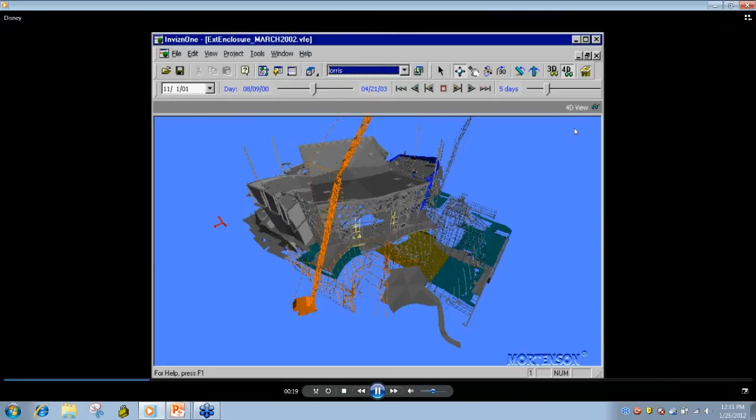It's not all that much different than what we use today. The graphics, of course, are a little bit better. You can tell it looks like somebody did a screen record, not an export. But you can see they had all the colors, they used the cranes, they did the sequencing. This was back in 1999 to 2002 that they created this.

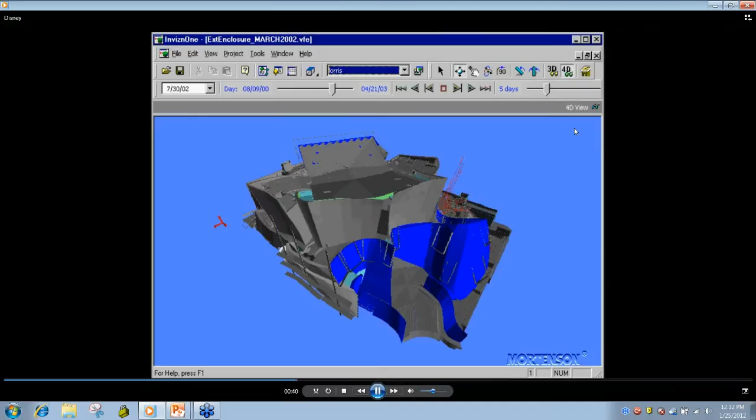This is the overall one. As you can see, the structure is definitely a product that uses 3D - the unique structure on the outer shell. So this one was the overall project.

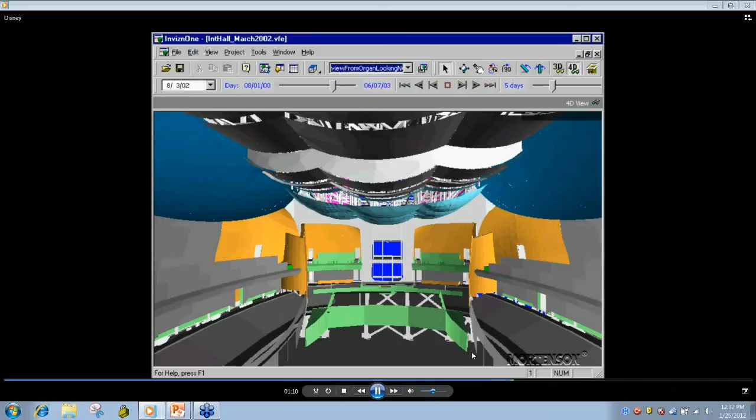Coming up here, I might just speed it up a little bit, is some detailed 4Ds they actually did to the project as well. This is some roof panels - they had all these crazy roof panels in the main concert hall. So again, they coordinated the panels, the steel, and even some of the MEP stuff. And again, this was back in 1999.

The other thing I would like to point out is in 2002, we formed our IDAT group - the Integrated Delivery Advancement Team - and all of our ICC's work underneath that group. From there, it really focused us on the VDC side of construction and put a good organization in place for Mortenson to start at that time and work for the future.

You can see there are quite a few different milestones on here. One of our latest milestones is in 2010, we signed an enterprise agreement with Synchro for our 4D solution.

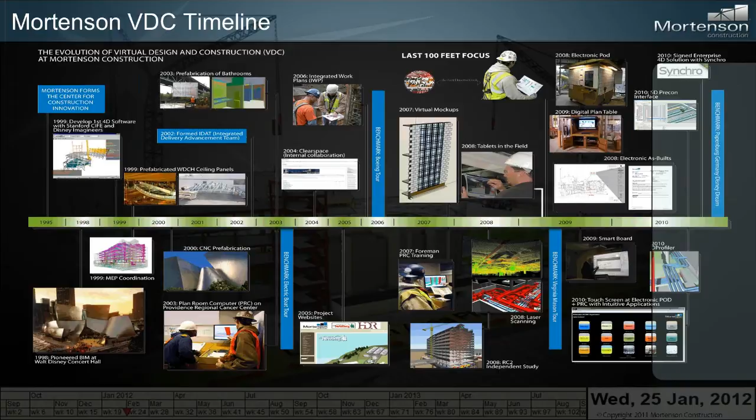A little bit about IDAT - IDAT's main focus is to integrate new processes, ideas, and stay on the leading edge of what's going on in the industry. We have 53 members across Mortenson in the IDAT group. We meet twice a year, once in the fall, once in the spring. We have a couple of representatives from each operating group that come to a central location.

We have a meeting, we have our committee report-outs, we do operating group updates. It's really a good way to collaborate and make sure we're all staying focused on certain things and we're not duplicating tasks across the country. It's a great group, and it's one of the main reasons I joined the company.

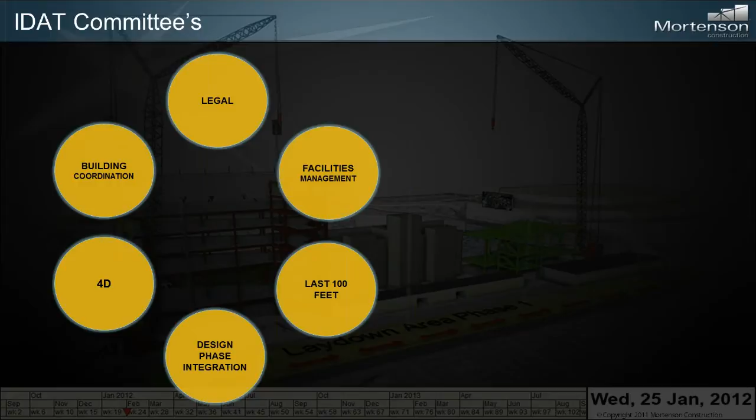The committees we have are a building coordination committee, a 4D committee, the design phase, the last 100 feet, facilities management, and the legal committee. All these committees come together as one to form IDAT, which is then controlled by an executive committee.

As usual, we come up with all these ideas, plans, and goals, but to get them approved, they have to go up to senior leadership. So we have an executive committee that consists of senior leadership members who approve our goals and plans and make it happen.

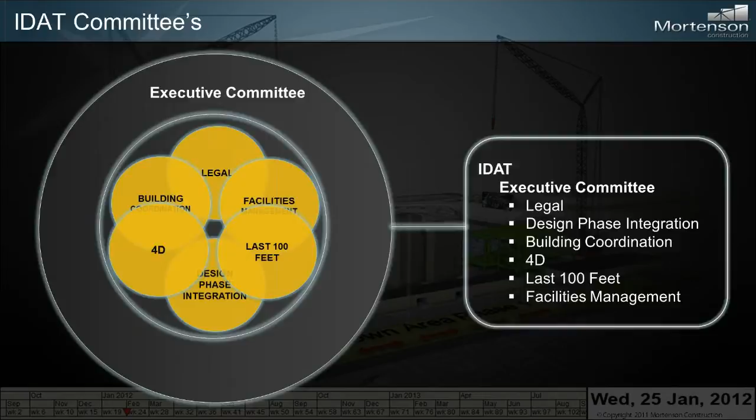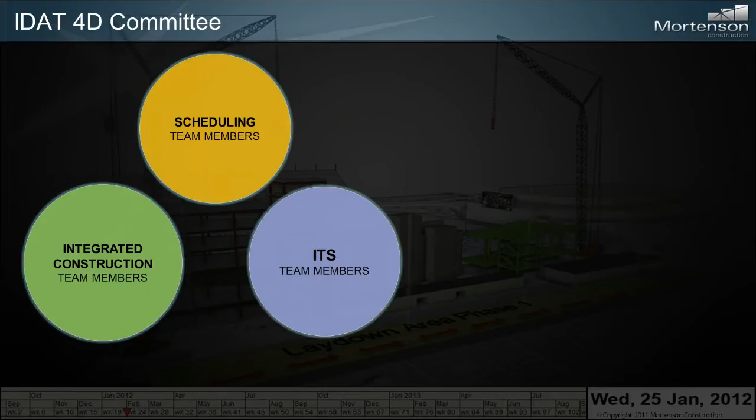A little bit more about the 4D committee, since that's what we're here to talk about today. Our 4D committee, at one point, we only had integrated construction people in the committee, and as we moved forward with 4D, we realized that to be successful, we were going to need to get scheduling and IT on board.

Before we start - early on, and Andre will remember this - scheduling was involved, but we kept coming in and going out, coming in and going out. Same with IT - they get involved, they back out, get involved, back out. Ultimately, we all got involved, we all got on the same page.

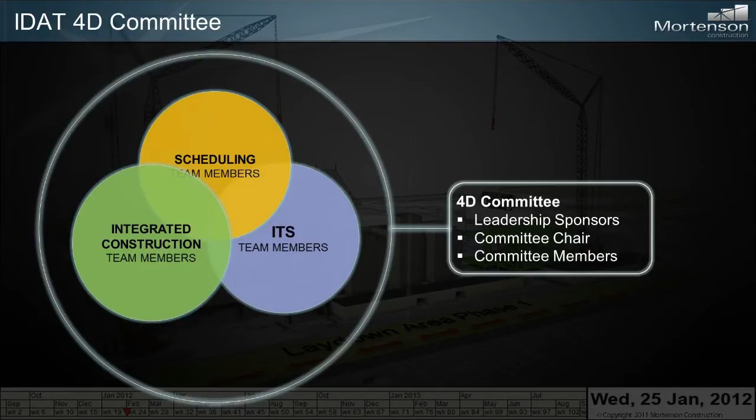That's the only way we could make 4D work at once. We all had to work together, and we just weren't doing that since 2002 - it was bits and pieces here and there. Again, the 4D committee has a leadership sponsor team that we run across all of our goals and schedules with, the committee chair - which I am, for the 4D committee - and, of course, our committee members.

From there, I want to start talking about our relationship with Synchro. In 2008, Tom came to Minneapolis to one of our IDAT meetings and presented Synchro for us.

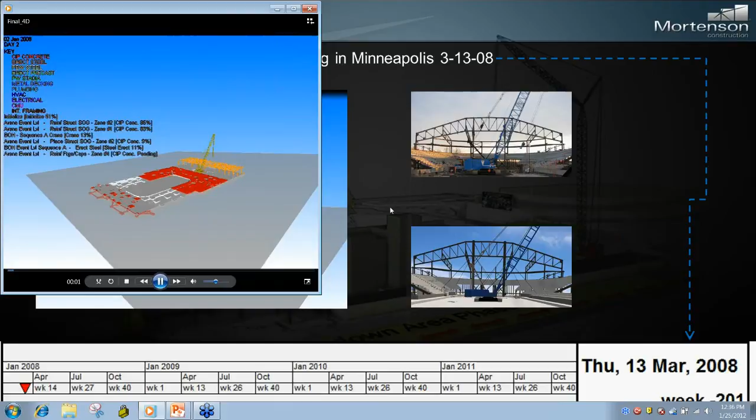Everyone at the meeting was pretty impressed with the software and really was looking forward to using it. At that time, we were using Navisworks. And what we've kind of learned on Navisworks, as other people have stated throughout this meeting today, is that it's kind of static.

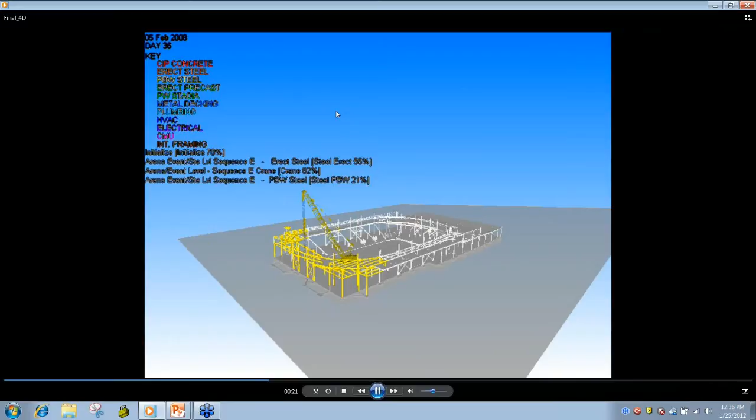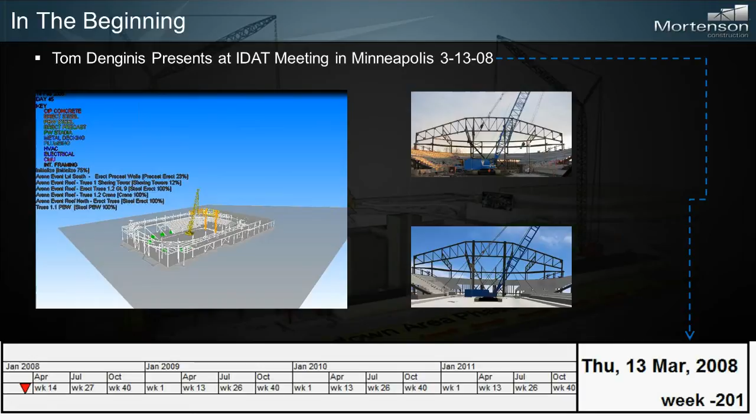This was a steel erection 4D that we did. It turned out to work for the project, but the amount of resources and time and effort that went into upkeeping it, updating the model, updating the schedule, getting it put back together—it was like every week we'd have a meeting to go over it. As we all know now with Synchro, we could work out these same issues in an hour to a two-hour meeting. Once we had this meeting and seen it, we were looking forward to moving away from Navisworks.

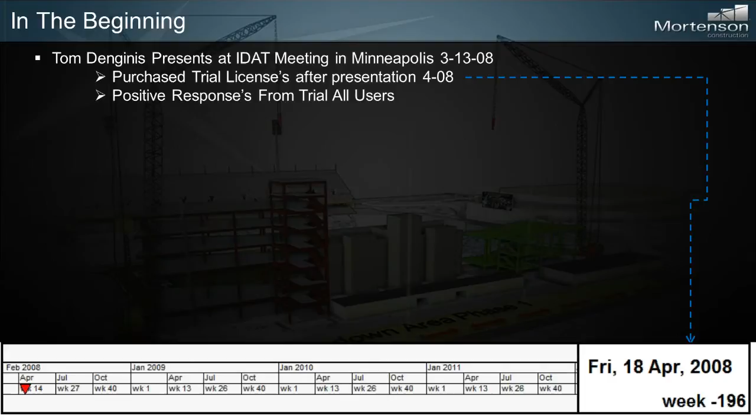Then in April of 2008, we bought our first trial licenses. A few of the operating groups agreed to try it out. Everybody that used it had really positive responses, so we continued to work with Synchro to work out a solution for us.

In April of 2009, we created our first production 4D models in Synchro that we were going to use for the job. I say production—we did do some BD work and some other ones—but this is what we really wanted Synchro for: to do on-site planning and sequencing.

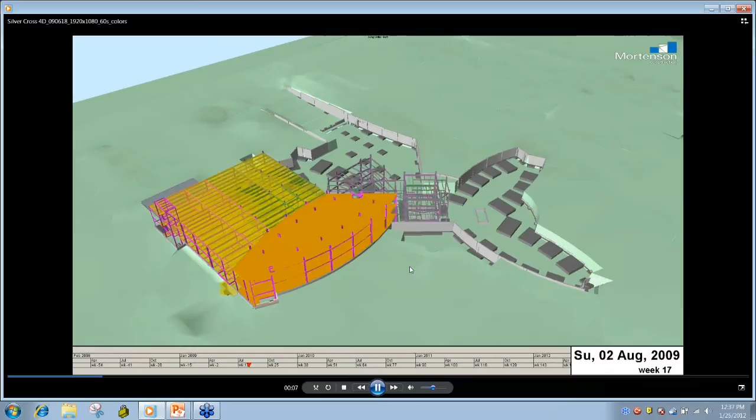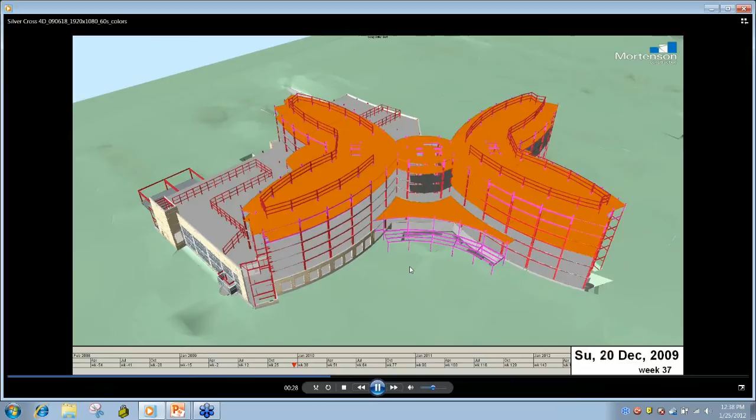So what we had to do is export out the P6 schedule. We emailed it across the ocean, and they would take a look at it. Ultimately, since the API wasn't working, we actually exported it into Microsoft Project and brought it into Synchro. But this also helped Synchro create the API between P6 and Synchro, which we have now, which has been very helpful.

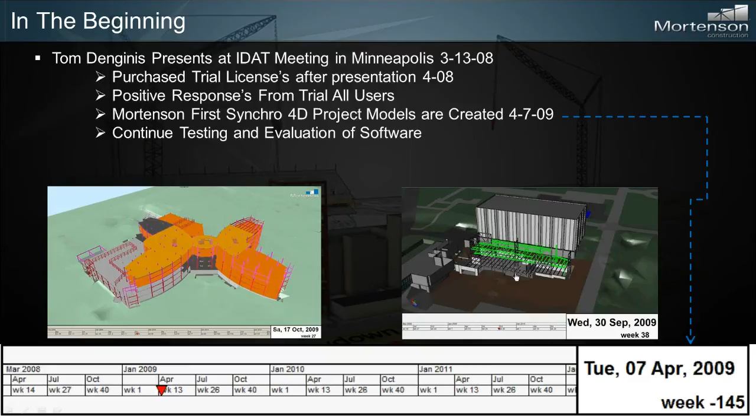The other project that we did was the steel erection for the Seattle University library expansion. On this one, we did mainly just the excavation and structure. It was very successful again in working out plans and sequencing.

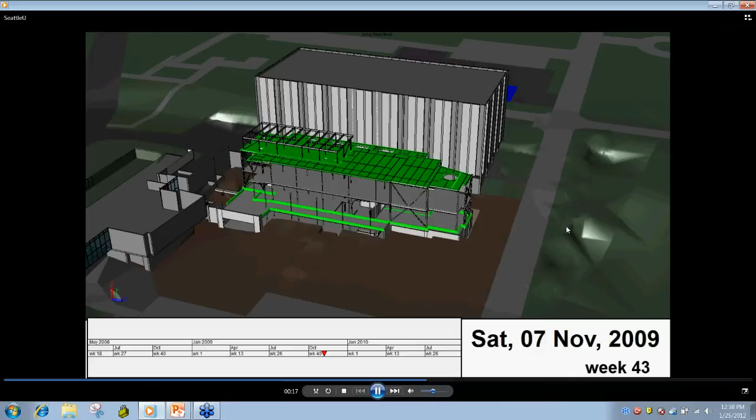Another thing that came from this, which kind of repeated along the way, is what I realized when I went over this with the superintendent: he never looked at the model. I showed him the model, he knew we had a model, but he never really looked at it. We go to do the 4D and he starts looking at it and he sees these brace frames that were designed to go from the first floor all the way to the top.

And he sees it and goes, 'Wait a second, we can't do this.' This was six months before we started, and our first RFI came from reviewing the Synchro model and seeing the brace frames were not designed correctly.

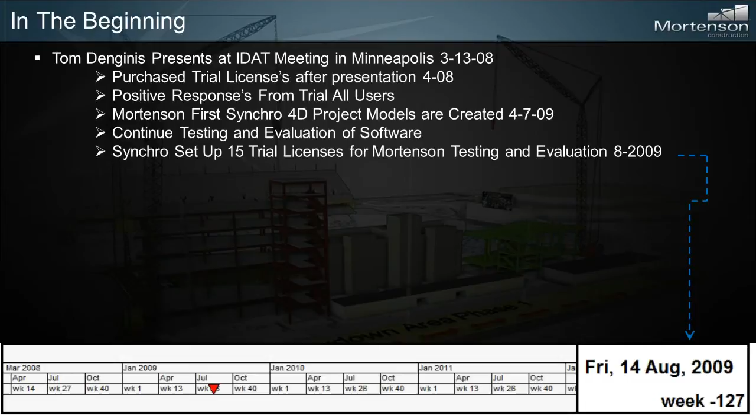From there, we set up 15 trial licenses with Synchro. We worked with Tom to continue our testing and evaluation. From there, in February of 2010, we had our first success with getting the API working with P6.

We still had some issues as far as how long it took and some timing issues. We continued to work with Synchro on that—they were great to work with. They helped us get everything up to where we wanted it. At that time, we got 20 more licenses for 90 more days to continue our evaluation.

At that point, we were able to get the scheduling department officially on board for testing. Until that API worked, the scheduling department didn't want to get involved—we were doing a little bit of testing, but we couldn't get them on board because how do you bring the schedule into Synchro? It still had to go through the ICC's hands, and it was like, no, that wouldn't work. So now we were fully on board, and we were working together with the ICCs to keep it moving.

Another big thing I got from the schedulers themselves is when we showed them Navisworks—again, it's a modeling software, it's a design tool, it's not a scheduling software. When they saw Synchro and saw that it had scheduling parts to it, they felt comfortable with it, and that was another key part of getting them on board.

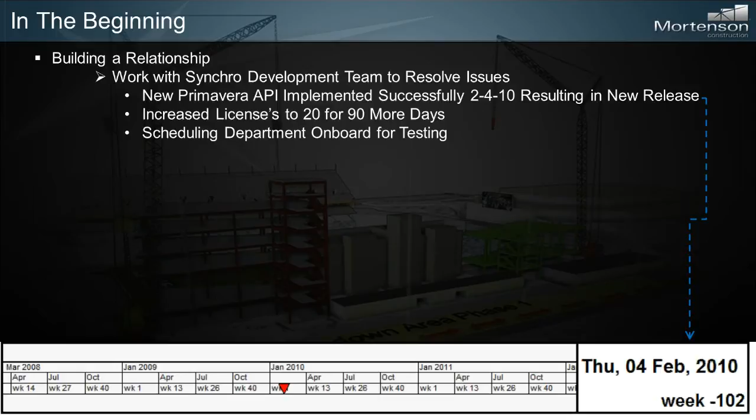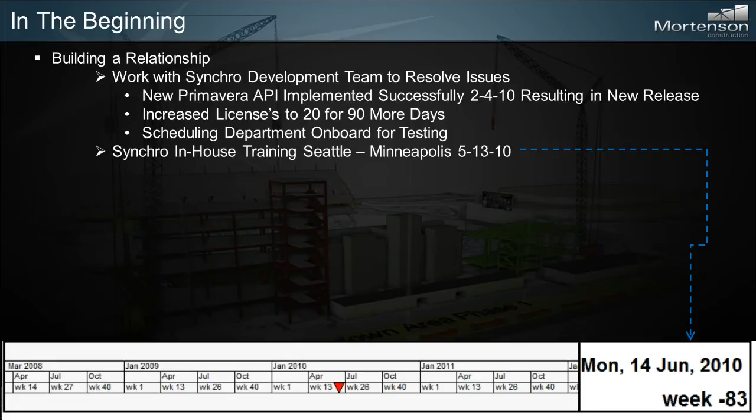After that, Stephen Dolan came to Minneapolis and Seattle and gave us the one-day training program, which was key to keep our evaluation moving and get the right people trained and involved and ready to go with Synchro. This was also key because the Minneapolis operating group was not on board with this. So we brought in two of their ICCs, and since I was the scheduling manager in the Minneapolis office at the time, we sat down and Stephen trained us. It was a very good training session, and it really got Minneapolis on board.

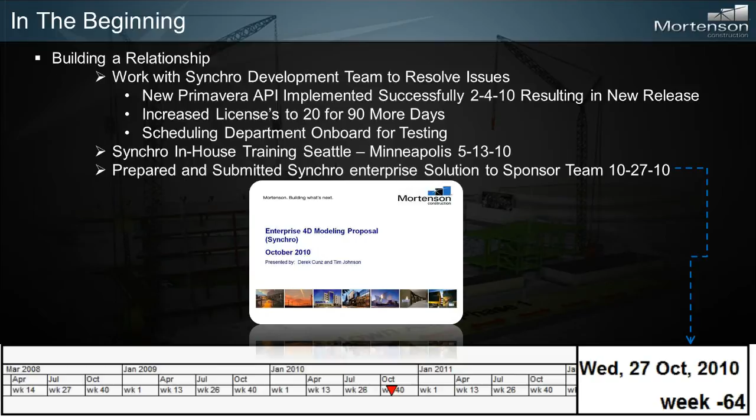From there, we prepared and submitted our Synchro Enterprise solution to our sponsor team in October of 2010. After some evaluation, the sponsor team agreed and the solution was signed.

If you notice, there's quite a bit of lag between when we had the training and when this was signed. A lot of that was because we were still working on the API issues, trying to reduce the sync time. It was about 4 to 6 hours for about a 4,000 activity project to get synced, and by the time we had this signed, it was down to about 2 hours, out of the Minneapolis office syncing to the remote site in Seattle.

Once we had the agreement signed, we formed a rollout team to roll out Synchro to the company. This team consisted of an IT lead, Kathy as the scheduling lead, and me as the ICC lead. We created a training and deployment strategy and then recommended an approach to our sponsor group.

The sponsor group approved the rollout, and we identified our pilot groups. We identified at least one pilot project from each operating group, so that way they could all be involved and give us what they needed.

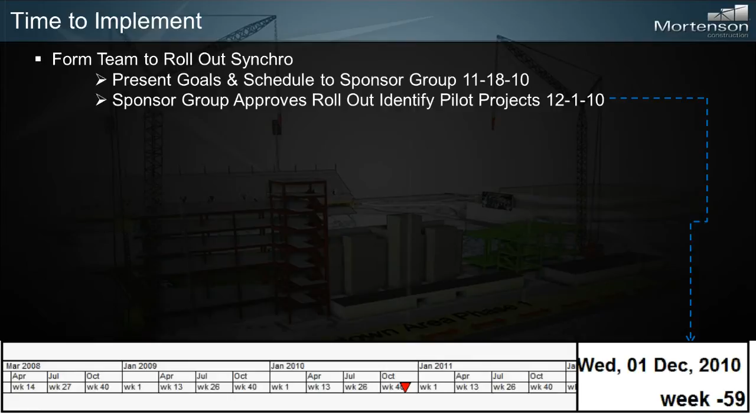From there, we realized for this pilot team to be successful, they were going to need training as well. One thing we needed to do to get training for our Mortenson personnel was work with Synchro to get their training program, then update it to be P6 instead of Microsoft Project. We had two full-day training sessions in Minneapolis where people came in from across the country, schedulers and ICCs, to take on the training.

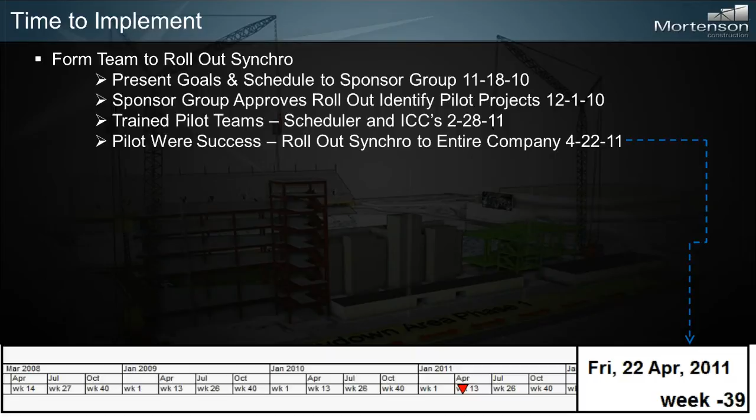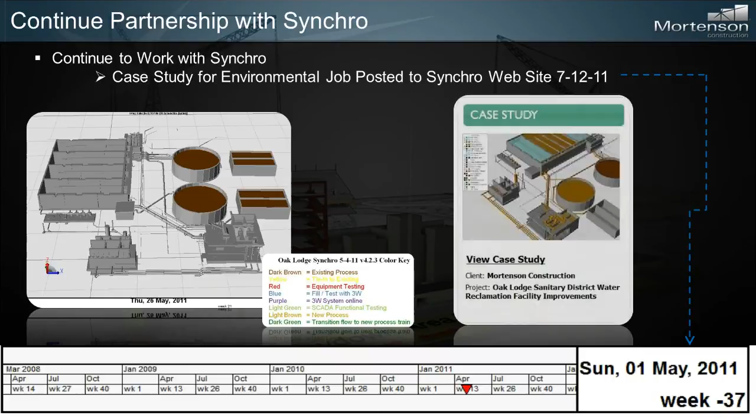The pilots were successful, and in April of 2011 we rolled out Synchro to the entire company. From there, we had quite a few projects take on Synchro and start using it. One of our first unique uses of Synchro was a case study we did for the Oak Lodge wastewater treatment plant in Portland, Oregon.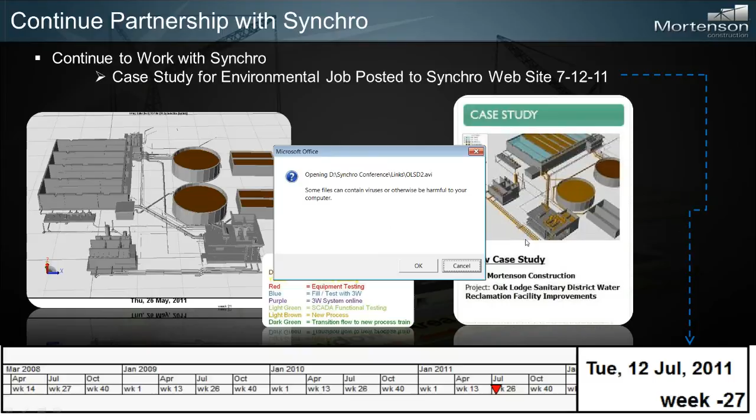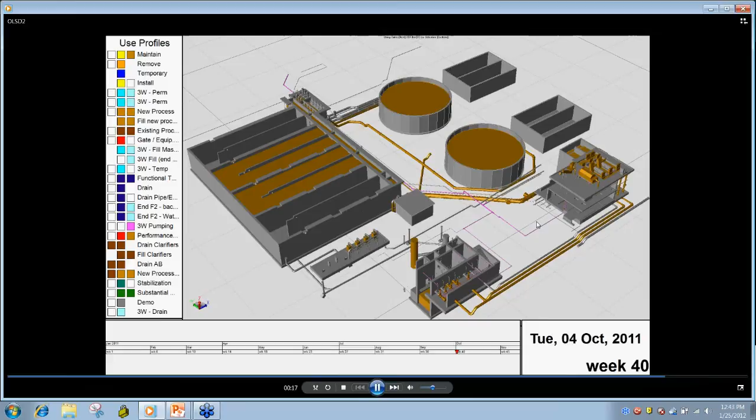This project was a pretty unique situation in that our scheduler took the model and linked up all of the scheduling activities to it. The schedule we were looking at involved an existing plant with an expansion, and there was a key date set where they were going to shut down the plant for 8 hours to do the switch over, turning off all the old stuff and turning on all the new stuff.

As you can imagine, you don't want something to go wrong at a wastewater treatment plant. The project manager liked the presentation so much that he asked the scheduler to stay with him that afternoon, and they trained him on how to use it. From then on, the project manager kept the Synchro model and schedule up to date, using it in all of his planning meetings, sub-meetings, and owners' meetings. It was a great success for the project.

One of the next things we did was prompted when one of the guys from a federal contracting group noticed that Synchro and Bentley were having a partnership. In our federal contracting group, we worked a lot with the Army Corps of Engineers, which required MicroStation models. Once I saw the article, I wanted to be part of this and help test it, because we were falling behind in those groups as far as Bentley and doing the 4D work.

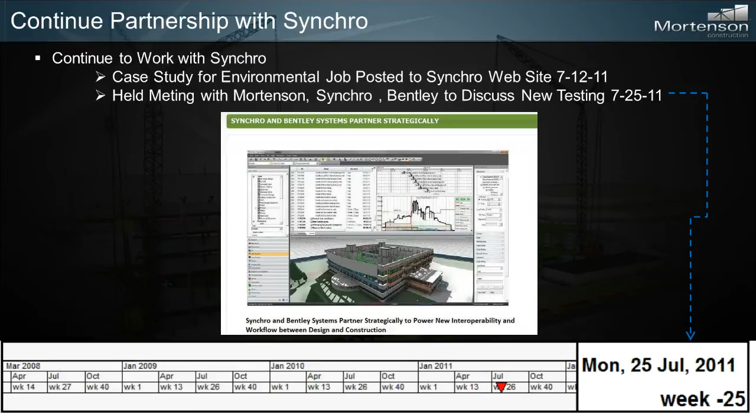We had some workarounds we had to do, but it was a lot more work than they were willing to do for the 4D. So once we got that, we helped Synchro, supplied some models to them, and did some testing on our side. Today they're creating 4Ds with none of the issues we had before. We're looking forward to the new release of the next upgrade.

Then in September, Tom got us a beta version of the next Synchro with the new API for the new Primavera P6.8, because since about June of 2011 we were testing P6 version 8. We were ready to go to it.

That was pretty difficult with that web application, so we needed to test Synchro with it. Synchro had to roll out with P6V8 when we did it, and we had to make sure everything worked pretty seamlessly. And it did. Since we had already rolled out Synchro to the company, we have strategic upgrades, and we didn't want people going to the next version while running multiple versions across operating groups. So we worked with IT, and they set us up a remote desktop to continue testing the API splicing, and that was key for us to keep testing and moving forward with Synchro while staying in production on the projects.

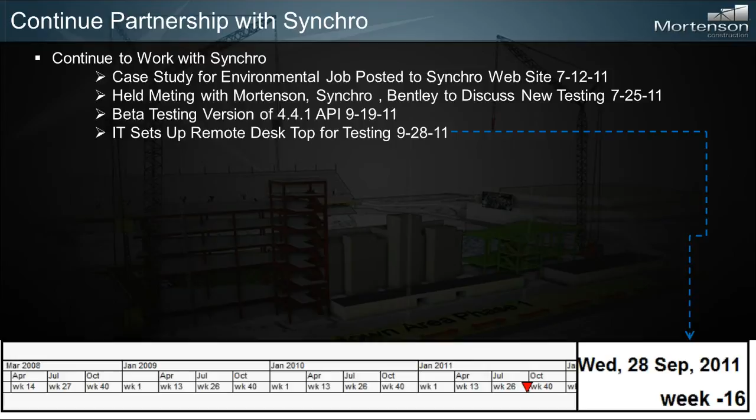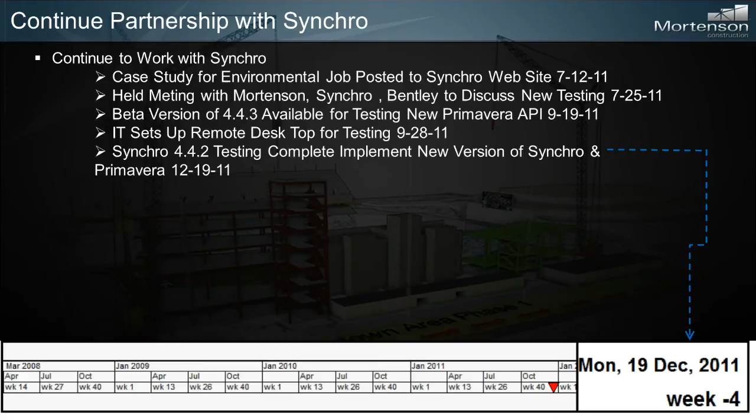This remote desktop is a Citrix desktop, so everybody had to go in through Citrix to do any testing. That was our first look at how Synchro worked in Citrix. Then in December, we rolled out the new version of P6.8 along with the next version of Synchro seamlessly, had no problems. All the projects were able to update with no problems syncing or with old schedules. Everything worked fine. It was the P6 side that didn't work properly.

But we were able to continue moving forward without any lag time. That brings us to our current state. One of our big focuses in our 4D committee is training, and we realize the more people we can get trained and familiar with the software, the more people are going to use it.

Like Neil was telling you, with Synchro's help, we started with their manual and updated it to include P6. We are continuing to update the Mortenson ICCs this week. They get sent the manual, they have someone to oversee them, and they have to work through all that training. This is lots of feedback.

We are just now incorporating it into our superintendent training, more as an overview for what they can see out on the site. We're going to use it for their 3-week or short-term look-aheads. We've put it on the plan room computers out in the field so they can pull up the model and see what's going on. It's getting ready to be rolled out in our plan of the day meetings at one of our job sites, so the superintendents can be right there with the model.

We also have some schedulers on board with it. They are also being trained, so we have job site schedulers actually using Synchro out on the job site with the superintendents. And we are getting ready to put it into our engineer training. We have a program where engineers go through scheduling training, about a 6 to 8 week in-house course, and during that time they are going to be doing Synchro on the site. So this is going to be pretty helpful. The first project using this is going down, I think, this year.

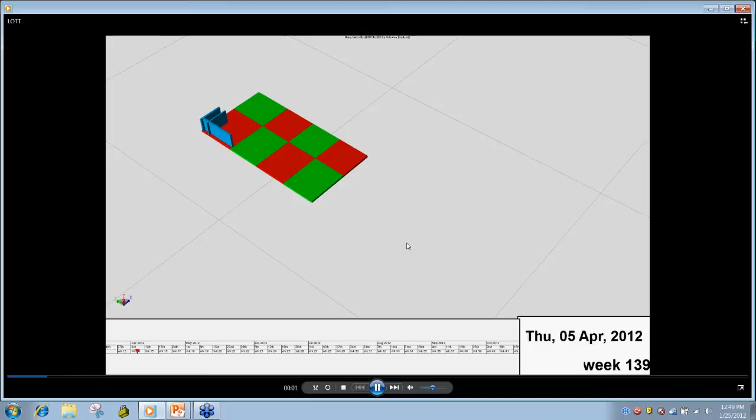Another one of our current uses is what-if sequencing and material sequencing. I'm going to show you an example here. This is another wastewater treatment plant, a big aeration basin they're going to build. If you can see the way the concrete has to be poured, it has to be poured in certain sequences because of cure time, so they have to stagger the pours in the way that it's going to be built.

So with our ICC working with the superintendent, we were able to clearly work out the sequence for him, and he was super happy with it. He's so impressed with the software that he's going to use this 4D model, send it out to the form subs and say, this is what we're building, this is how we're going to build it, we don't want any extra forms, give us a quote and give us the material to build it just like this. We're going to use the 4D model to get that information from the sub.

Another thing we've noticed, which has come up a few different times today, is that when you're doing a 4D model and you add every piece of detail from all the models you get, it really slows down the 4D modeling and everything else. So what we've decided is we're identifying certain areas of a project, that piece of the schedule and that piece of the model, and concentrating on those areas, just creating mini 4Ds of little areas.

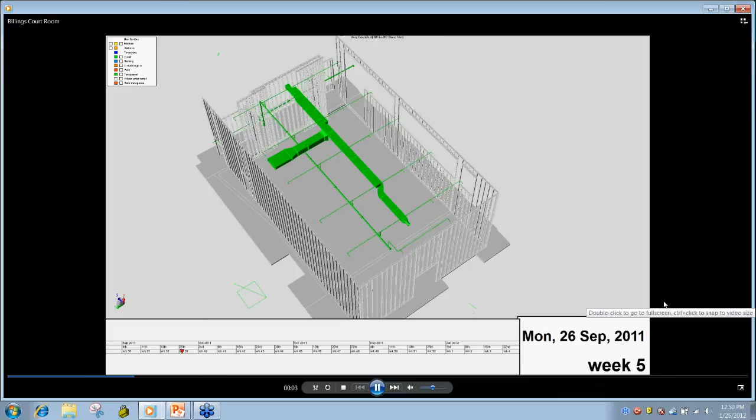The one here I'm going to show you is in Billings, we just finished, or we're about to finish up a new courthouse for the GSA. And in this courthouse, there are 4 different courtrooms that are almost identical. So what they decided to do is take one of the courtrooms and work out all the sequencing from the casework to the MEP, to the furniture, to the flooring, and worked it all out through here.

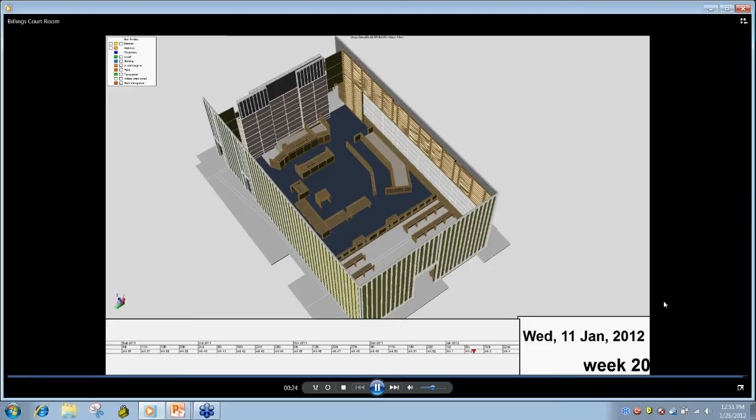And again, in this one, they found constructability issues with drawings compared to what the subs were going to do. And after a couple of weeks of meetings back and forth, they were able to use these models again to work with the subs and then show the exact sequencing of how everything is moving.

Another one that came out of the Billings courthouse is that one of our new requirements for any type of work that we do is we do an integrated work plan. And our work plan has safety, quality, sequencing, all the things you would need to do for a certain piece of the project. On this project, they could talk about sequencing to a point, but...

What our VDC was able to do is he embedded the 4D sequencing video into a PDF that was then used at the plan of the day with the subs and everyone else to show the sequencing, not just talk about sequencing. And again, everybody was really impressed and it ended up being a huge tool for this part of the project.

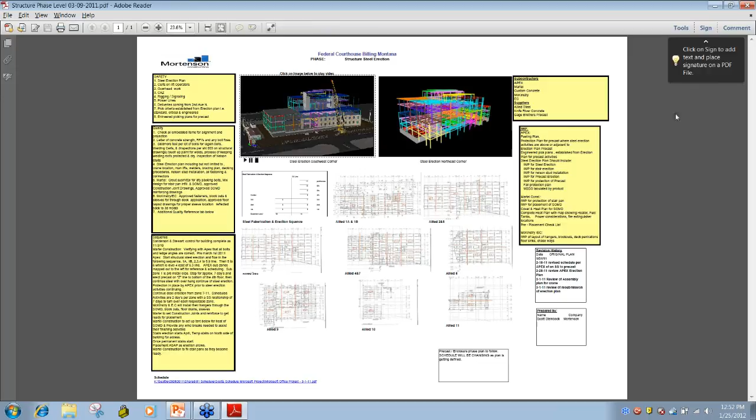Another thing that we're currently seeing more and more is requirements to do 4D. More and more owners and projects are wanting a 4D project. From here, I'm just going to start playing a compilation and kind of talk through the rest of this.

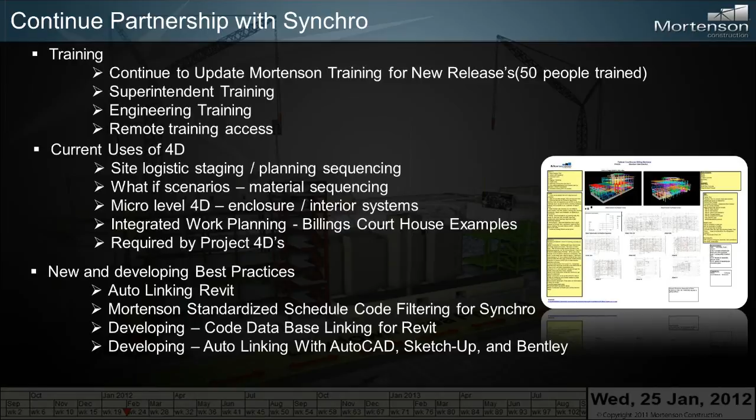The first one that's going to be on our compilation video here is the Pegula Ice Arena from Penn State. This project requires a 4D update along with the schedule every month. And from this project alone has really driven a lot of our best practices that you've seen on this slide before.

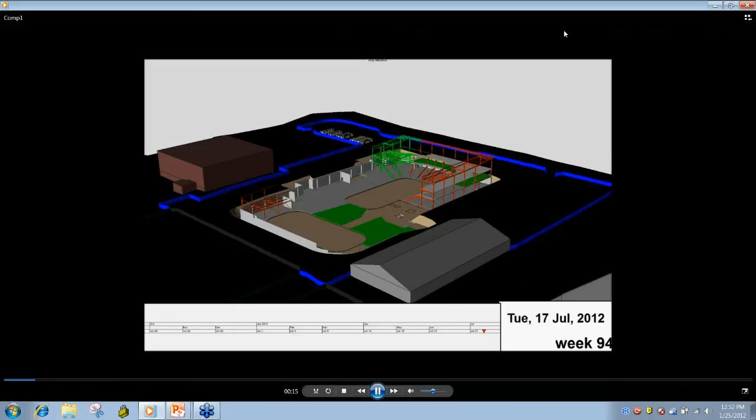One of the first best practices we developed was auto linking with Revit models. And that became key to really being able to keep the models up to date, linking the models very quickly.

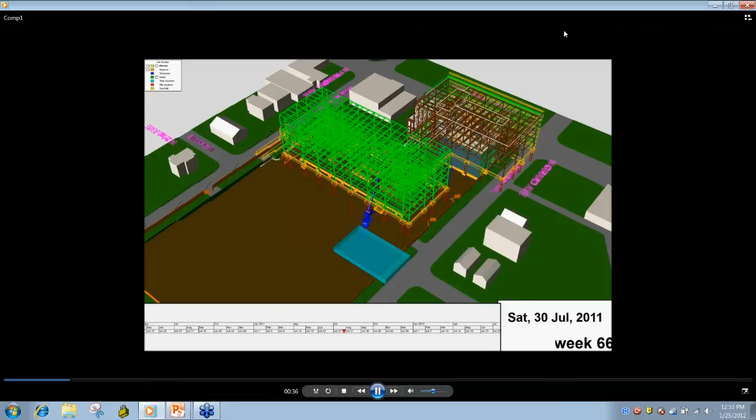What we were able to do is in Revit, when we made an added user field called 4D, we could take the codes from our schedules and put them in that user field. Then when you bring the model and the schedule into Synchro, you hit auto link, set up your parameters,

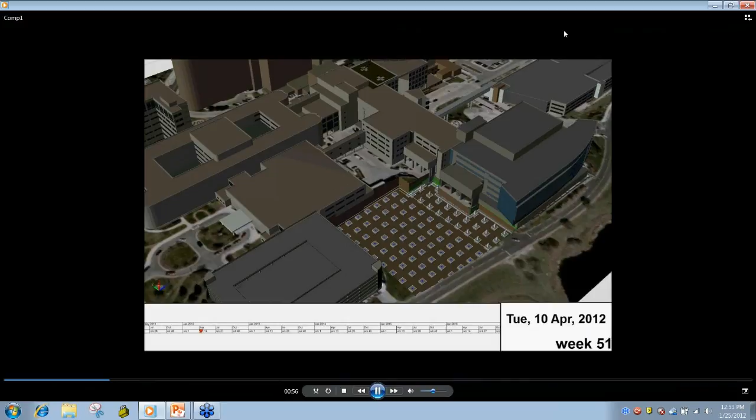push the button, and within a few minutes your whole project is all synced up. And along with that, with all the work we have done with Synchro, it is now able to resync the schedule back and forth, and we don't have to have the same schedule name for our what-ifs. It's been very nice for them to be able to link the model a lot quicker by resyncing.

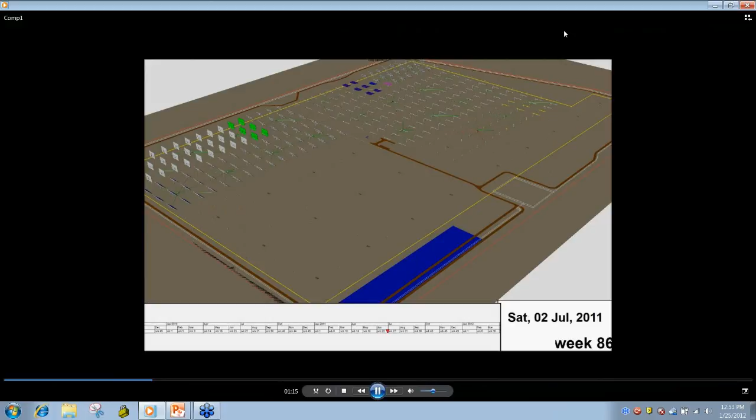Another best practice we did is we had a scheduling standard that we use for scheduling in Mortenson. With that, we were able to take advantage of that standard and develop filtering systems in Synchro that really easily let us filter out the schedule and the model, if it's a Revit model, showing the type of work and where it's at. So we can just say, let's see steel erection.

We can take the overall 4D model, filter out everything with the steel, and model steel and the schedule and run just the steel without having to go out and create a whole new model.

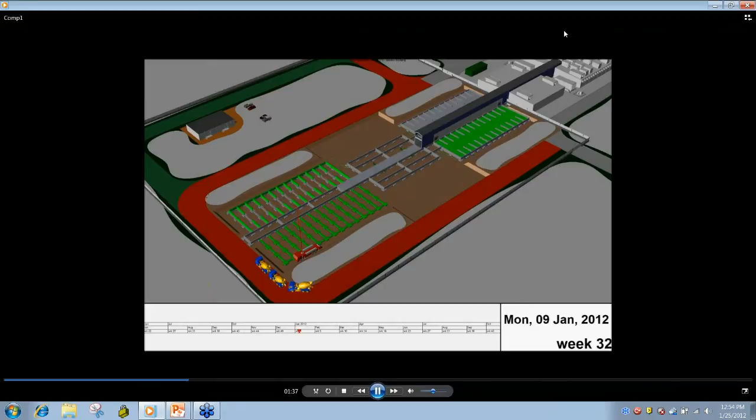The other best practices we're developing right now on the Pegula Ice Arena, again with the updates every month, we're getting the updated model like every month as well. And instead of having to go back into this model and recode it every time we get a new model, we're working on a database link where we can store the codes in a database outside of it.

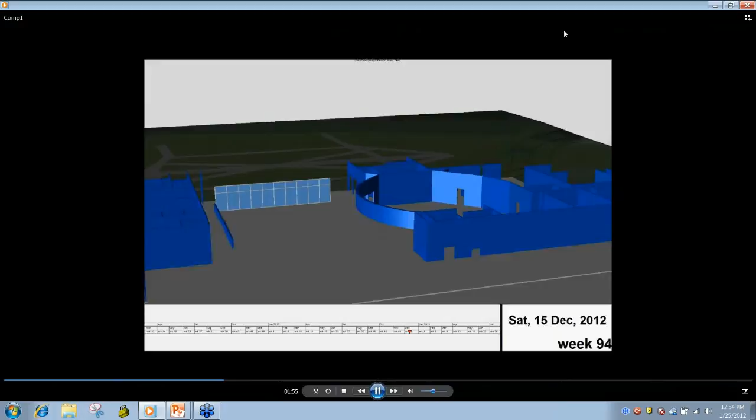We get the new model, it goes back and looks at the model's unique IDs and reapplies the codes to all the existing codes that we have. We just have to add the new codes, bring it back into Synchro, auto link, and we can update a model in a couple hours.

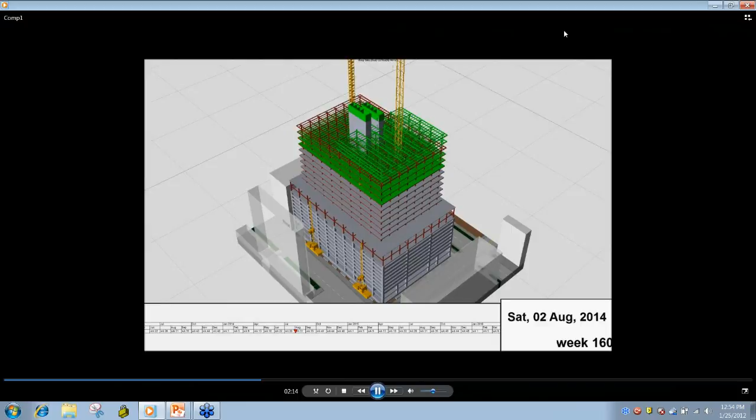And the last best practice we really need to get on is doing auto linking for all the other types of modeling software out there - all the AutoCADs besides Revit, SketchUp, and BIM.